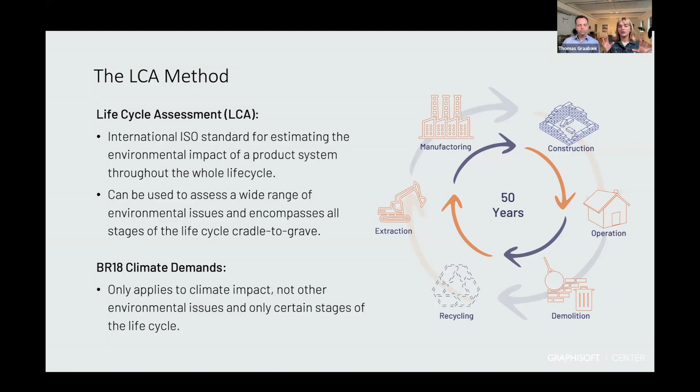But according to the Danish Building Code, we only have to assess CO2 emissions in our LCA, assuming a building lifespan of 50 years. This is the timeline of the Danish Building Code requirements, focusing on buildings built after 2023, when the requirements become applicable.

The LCA only takes into account the global warming potential, essentially the CO2 equivalent emissions from the building. All buildings need an LCA when applying for a building permit, but only buildings above 1,000 square meters need to be under a certain threshold—12 kilograms CO2 equivalents per square meter per year as of right now. This threshold will be revised, and in 2025 it will be extended to include all buildings regardless of size.

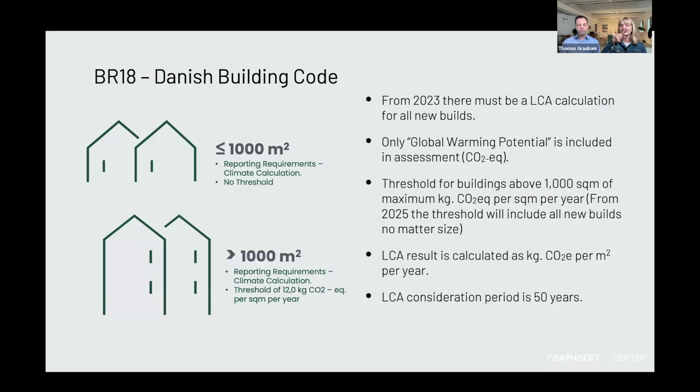Back to what the life cycle takes into account: when making an LCA of a product, the different life cycle stages are divided into modules, labeled with a letter and a number—A1, A2, B4, C3, and so on. These are the modules a building is divided into according to ISO standards.

According to the Danish Building Code, we don't have to take all modules into our LCA calculations—only the ones marked in orange. This is the production stage: extraction of raw materials, transportation of raw materials to the manufacturing site, and conversion of raw materials into products.

During the use stage, we need to include the replacement of building components over time and the energy consumption during the building's use. For end of life, we only account for waste processing and final disposal. We also include Module D, the recycling potential, representing potential future benefits of recycling. This can be hard to assess since recycling technologies and potentials constantly change, but we still have to implement it.

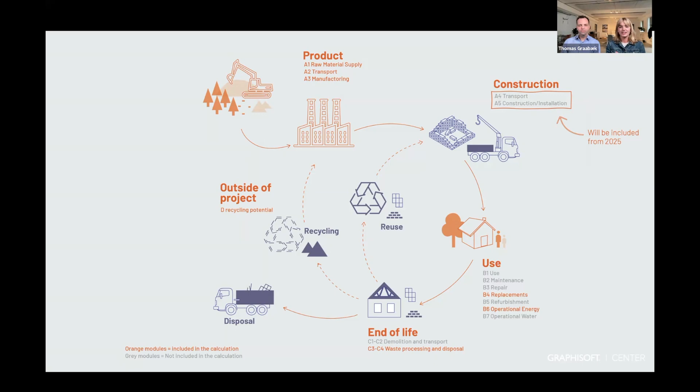I've talked about requirements applicable from 2023, but also mentioned requirements from 2025, because the thresholds and overall LCA requirements are constantly revised. This is the timeline of the initial plan for Danish climate legislation's involvement in the construction industry. The overall goal moving towards 2030 is to reduce total CO2 emissions by 70% compared to 1990, and to reach this goal we progressively lower the emission thresholds for buildings.

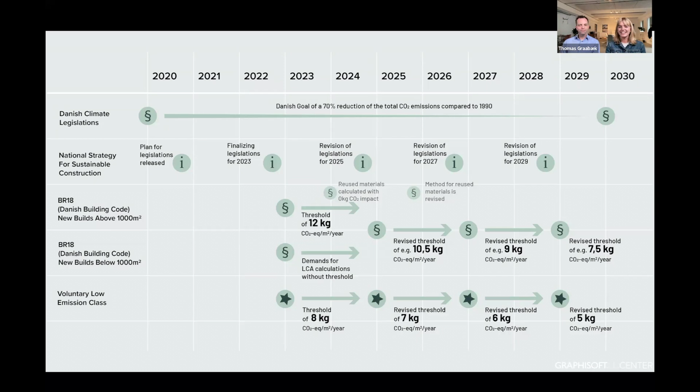As discussed, in 2023 the threshold is 12 kilograms CO2, but only for buildings above 1,000 square meters. The threshold is revised in 2025 to 10.5 and includes all buildings regardless of size. Again in 2027, the threshold is lowered further, and so on.

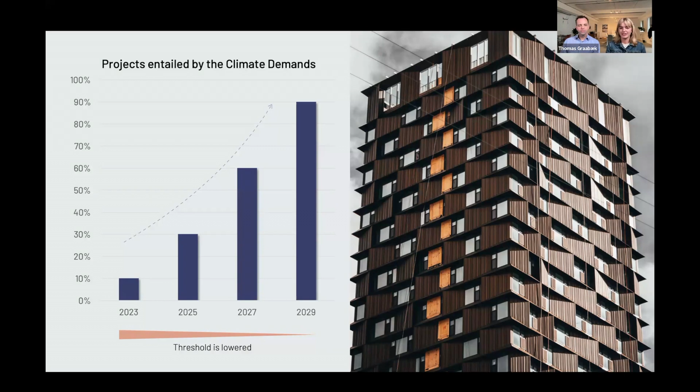Moving towards 2029, as the LCA requirements become more comprehensive, the fraction of building projects affected by these regulations gets bigger—more and more buildings are affected by these demands. In 2023, only 10% of building projects were affected by the requirements, but by 2029 it's assessed that 90% of building projects will be affected. This shows that building projects and professionals need to meet the requirements sooner rather than later.

Especially because the timeline we looked at before was the initial plan, and this is a new plan that's applicable from 2025. With this new plan, the threshold not only applies to all sizes and types of buildings, but we differentiate between the different building types, and each has its own individual threshold.

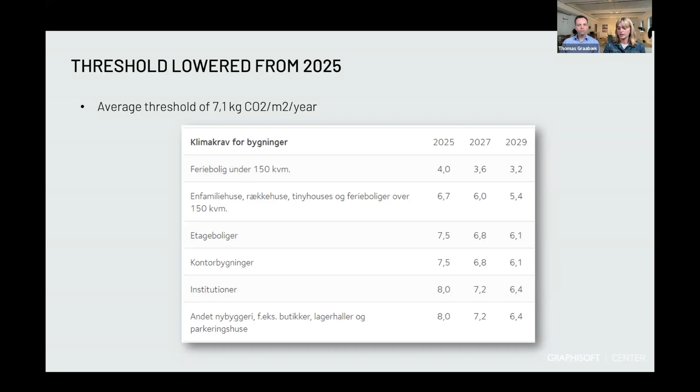This means vacation homes need to stay under a threshold of 4 kilogram CO2 equivalents, and office buildings need to stay under a threshold of 7.5. Overall, these revised thresholds are lower than the initial threshold applicable from 2025. We were supposed to go from 12 today to 10.5, but now we're actually going to an average of 7.1, and for some building typologies, all the way down to 4.

So this is a major change coming in less than a year. Yeah, it is. And it's very exciting to see how the building industry will meet these demands.

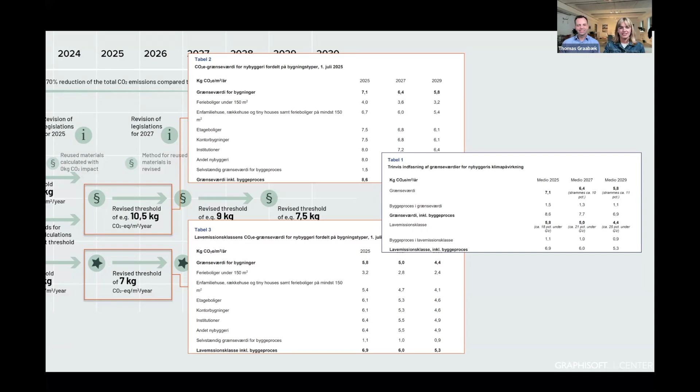As far as we know, it's also in front of all other countries. I don't think there's any country in the world with these strict regulations for all new builds.

In the following, I will take you through the Danish building code specification. But first, I will quickly go through the first revision of the Danish building code involving the LCA requirements.

The key takeaway is that an LCA is mandatory for a building project when applying for a building permit after January 1st, 2023, to document an LCA, and it is the building owner who must document it. But it's not specified which disciplines have to calculate the LCA, nor which tools to use or how to document it. It's just important that the documentation is easily understandable.

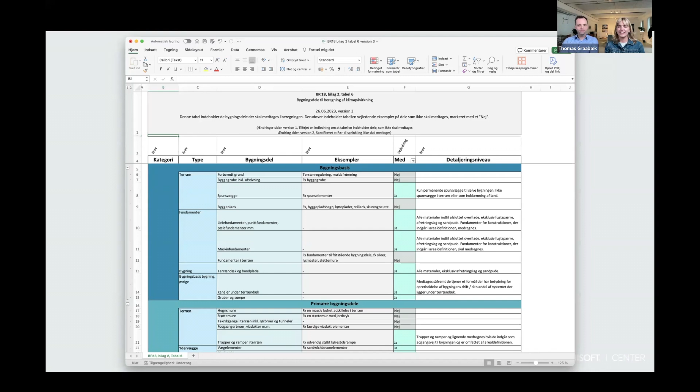The first table provides information on whether a building component or building part should be included in the LCA calculations. For example, stairs are supposed to be included. The last column gives details on when to include them and to what extent—for example, stairs are only required if they are a way of accessing the building, or if they're part of the defined building area.

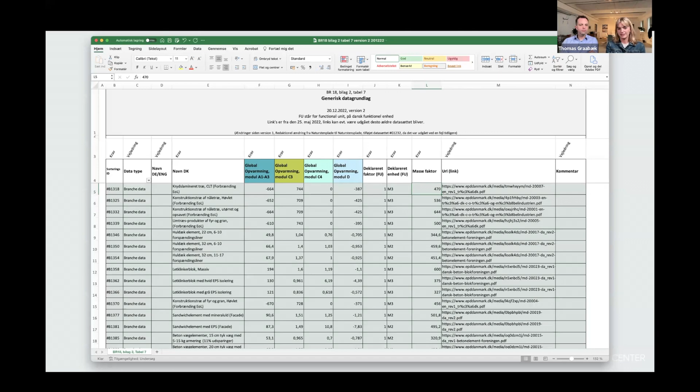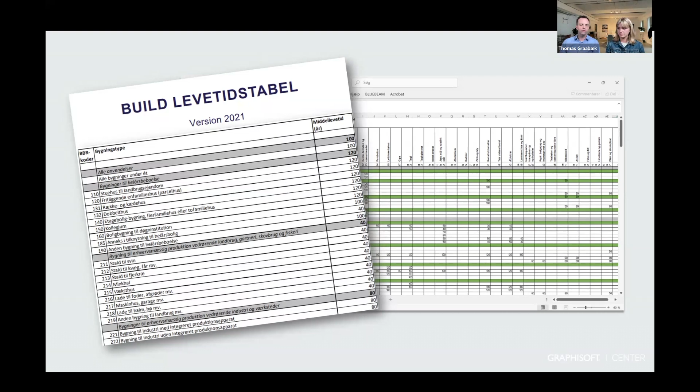So normally when you want to do an LCA calculation, you need to get a lot of information on all the materials, all the products in the building. And that can be super time consuming, and often you run into products or materials that don't have any information available. So to make sure everybody can do an LCA now that it's mandatory, there's a list of generic data you can use, so you don't have to get all these product specific EPDs and values.

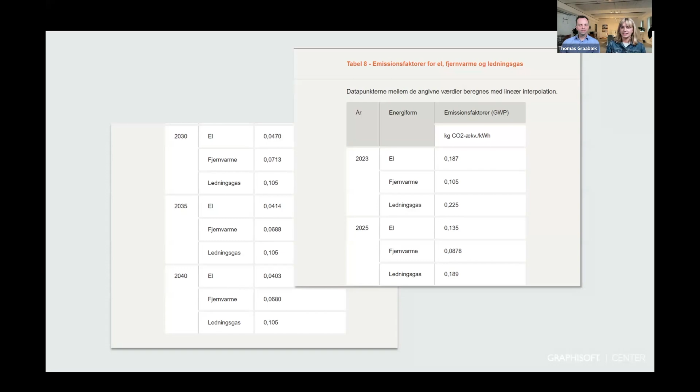So they are especially relevant during the building use when calculating the environmental impact from ventilation and heating and all those things. Yes, and before Thomas takes over, I will go through the latest revision of the building code regarding the LCA requirements, applicable from 2025.

So it's still mandatory to document an LCA when applying for building permit, but now it's after July 1st, 2025. As I mentioned, the thresholds will now include all building types, but will also differentiate, with specific thresholds for different building types. We also need to implement the construction process, modules A4 and A5, as I mentioned.

Lastly, new materials, emission factors, and levels of detail, like the ones we looked at in the tables before, have been added or maybe changed to be more accurate.

Perfect. Thanks, Roberta. We got a couple of questions. First, it's my question. You said when you're applying for the building permit, you get to present this to some authority. What is it, the municipal? Is it something else? Where do you submit that?

You submit it to have the use permit, so it's not the initial permit, but the last use permit. You apply to the municipality, and they look at your LCA calculation, and if they don't believe it, they ask for more documentation until they believe that it's true. And if it seems there's some mistake, and you find out you're actually above 12 kilograms of CO2 per square meter per year, then you're not allowed to use the building.

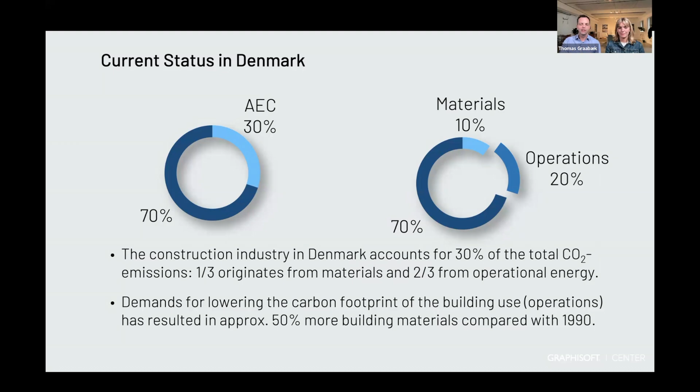And if we compare two kinds of projects, both of them are DGNB certified - that compares to LEED or BREEAM in North America - then 25% on an average concrete apartment project would be the operational energy, and 75% would be the material use.

If you make the same kind of project but with a wooden structure, then 60% would be material CO2 and 40% would be operational energy. So these percentages change when the total size of carbon changes.

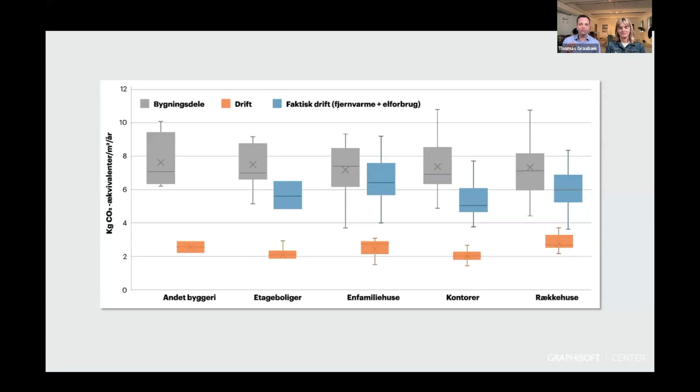And therefore, if you try to calculate the real use, actually 60% of the CO2 is from the energy used, and only 40% is materials.

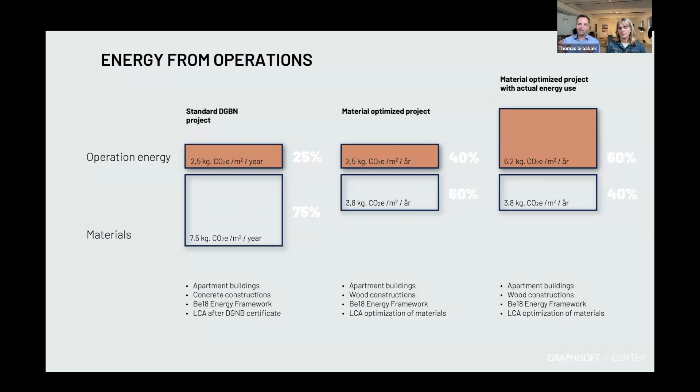My personal point is that we should try much more to balance the view between material use and energy. We cannot just add more insulation and more layers of glass, because we've already reached the maximum capacity of that. Often in Denmark we have 30 centimeters of insulation, and it doesn't help to get 35. So we need to change the design of the building, the size of the windows, the placement of glass, to make this better. And for that, LCA is a perfect method.

Right now there are a lot of different tools, some Danish, some international. The most known is probably One-Click LCA, a web-based product, and it's really good. You can do all kinds of LCAs, also just for greenhouse emissions on buildings. Ours is called Design LCA, and we of course think it's the best one of all.

And then there's LCA Byg, the governmental free LCA calculator, which is more or less a huge spreadsheet where you enter all the quantities, add all the EPD data, and then do the calculation in the end.

So we're going to focus a bit on Design LCA to show you how that works. In Denmark we have a website that shows all the different LCA tools, so people get a chance to compare them, find out which one suits their wallet, their needs, and their expertise. That's really clever given the demands we have in the country.

Our approach, being a BIM provider, is that LCA should be done within BIM. So it's a very strict BIM tool, but it's also a very easy tool. Where some other solutions can do all kinds of LCAs and all kinds of scenarios, ours will just calculate the CO2 from the building you model in BIM. If you don't model it, it's not calculated. So that's kind of an easy way.

The reason we started this project 2.5 years ago was because one of our customers using Archicad was at a training, and they asked: with all this information within BIM, wouldn't it make sense to do LCA calculations directly in BIM? We had no clue this was possible, but then we figured out it's actually not that difficult a task to do inside the BIM application.

Then we worked together with a well-known Danish company called Lendager, an architect office that does very sustainable buildings and focuses a lot on upcycling. We did a few different projects, and this one is a competition project in Germany to test if this works.

What they found out was, if you want to do LCA in a way that's not just documenting something you've already drawn, modeled, and designed at the end of the process, if you want to use it as a design tool, you need to do this in the architect office in the early stages while you test something. You cannot have the engineer working in parallel at that phase, because that would require a lot of calculating by the engineering office, which would be very expensive and time consuming. So the architects need to be able to do this themselves from the early stages.

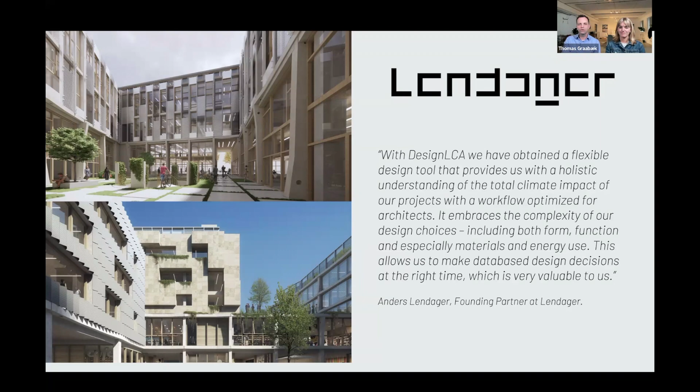With Design LCA, Lendager can now do this themselves, and they say LCA has become a design parameter in their work. So every time they decide something, one of the key parameters is how this performs in terms of carbon footprint. On the technical side, it's just a dashboard: every time you model something, you can see how it affects the CO2 footprint of the building over the first 50 years.

Design LCA is a free plugin, so everybody can download it. It works for Archicad 26 and later. It fulfills the requirements of the Danish building codes, but also the ISO standard of LCA, so it works all over the world.

In Denmark, we deliver it together with a template where we have all the generic data from the Danish building codes, so it's much easier to use in Denmark because we have this data included. In other countries, you need to find EPDs or use an EPD database, and build these different materials yourself, because Danish generic data might not be applicable in other regions of the world.

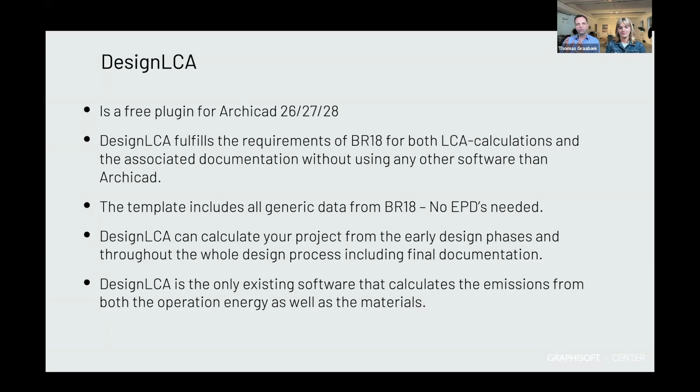But I know some BIM providers are providing a template which has LCA or CO2 data included for Design LCA. Everything is done inside Archicad, and we're the only software for LCA calculations, as far as we know, that can include both CO2 from material use and CO2 from the energy for operations. So that's the special thing about Design LCA.

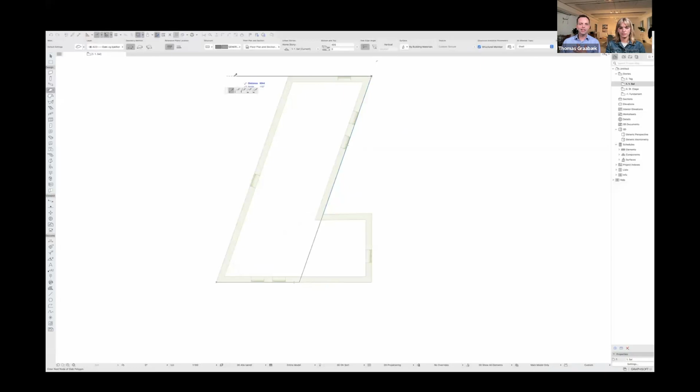So I'm going to show you the first of three videos, a time lapse of the whole workflow using Design LCA. You just open Archicad and start modeling. I'm an architect, so when I start modeling, I have no clue what materials the building will consist of, so it's just gray.

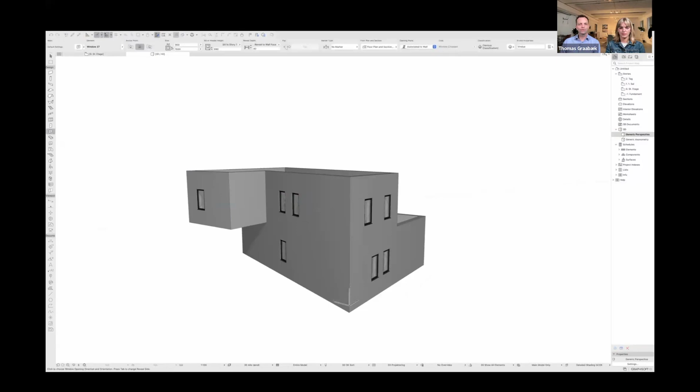At some point I need to add materials, not because I need to know what it's built of, but because I want to do visualizing, so I need some materials on the facades. I think we also need a roof. After the roof, I'll pick all the walls of the project and add a composite, layered material with one click.

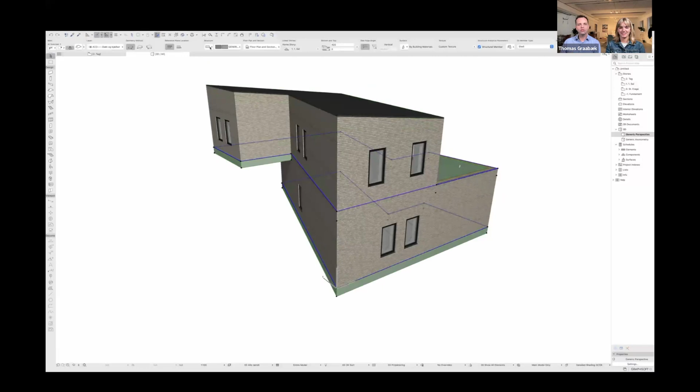So now pick the walls, pick the walls, pick the walls, and change, and pick the slabs and change. You can see the layers on the slabs, but I don't want to show this, so I just model some kind of material around these slabs, and then add foundation. Later on I'm going to change this project to a wooden structure, and the concrete foundation will still be concrete, so this actually has a big impact on the project.

Then I model some kind of gateway to the building, and that's not supposed to be included in my LCA. So the reason I model it now is to show later on that I'm going to exclude it from the LCA calculation.

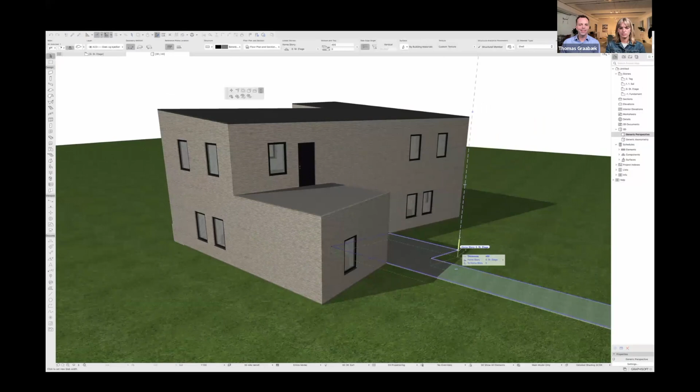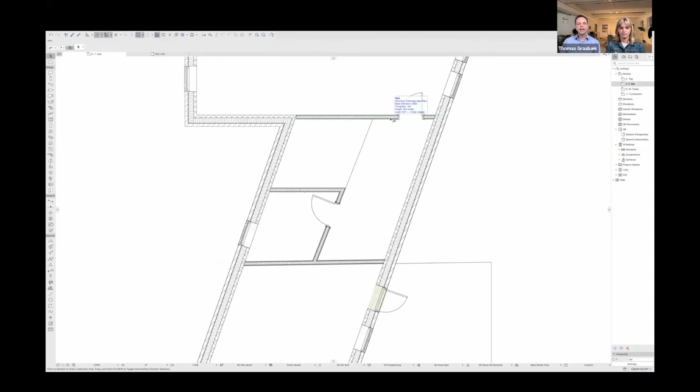Now I think I'm ready to add my rooms to the project, so Archicad understands the outer perimeter of the building and how many square meters it is. I need to have rooms, BIM objects for rooms, inside my building, and therefore I might as well add the internal walls.

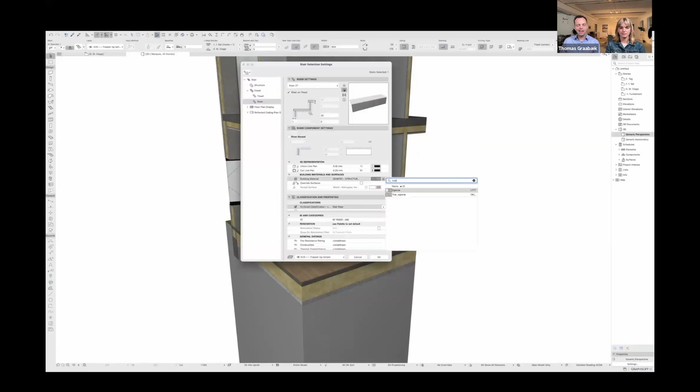When I have a two-story building, it makes sense to add the staircase, as I do here, but more importantly to cut the hole in the slab, because then I don't use too much CO2 on something that's taken away later on. So there's some kind of detail level that is optimal for an LCA calculation, and that's what I'm trying to show with this video, the sweet spot for modeling.

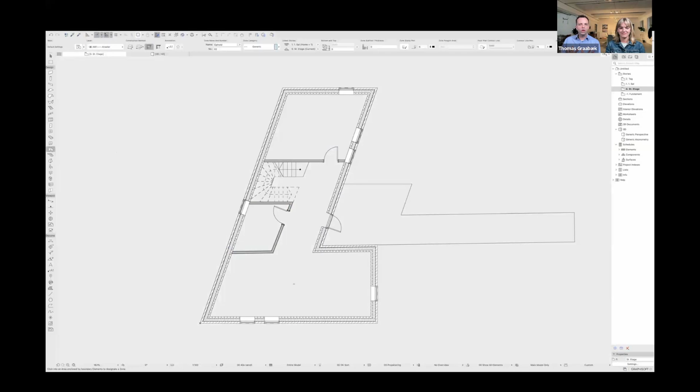I think now I've done the staircase. For the Revit users out there, I know using Revit it will take much longer to do the staircase, but in the end it's more or less the same we do. So now I can just stamp out the rooms in the building, and that's the last part of the modeling.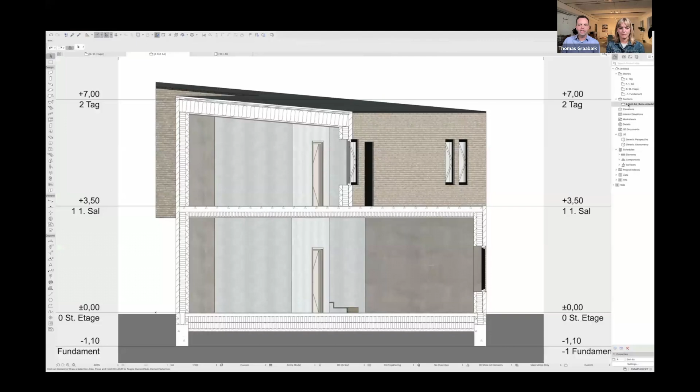It needs to show the perimeter of the building, so I need to cut the rooms with the roof, so it knows where the end of the building is. This is the section that shows the sweet spot of the detail level for a model that's really good for LCA calculation. So that's the end of modeling.

Now let's start calculating. I open up the Design LCA dashboard. I can see the settings here, and then I can see there's 80,000 kilograms of CO2 on this project.

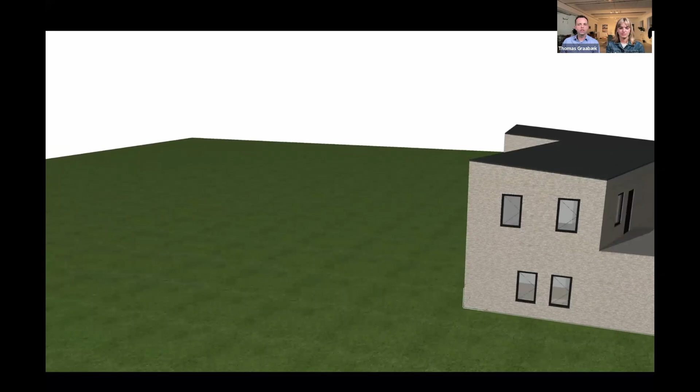I can see the different materials, they have CO2 values, but now I need to do an energy calculation for the operational energy of the building. So I add all my rooms to what is called a thermal block, and I assign different building systems for heating, cooling, and ventilation to this thermal block.

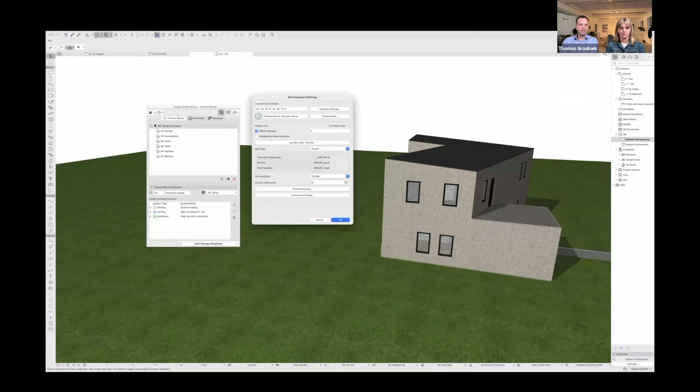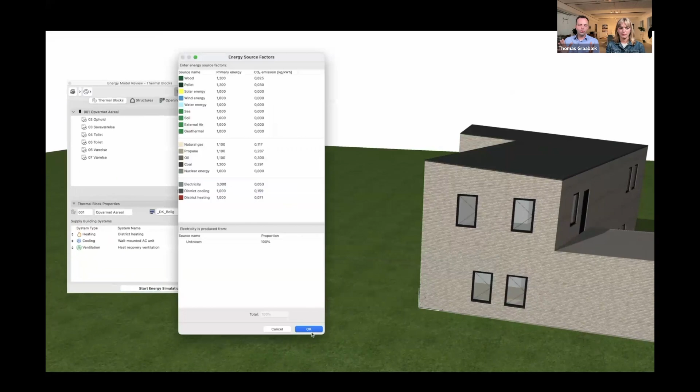And then I say it's apartments, so there's a special use case here. By standard, it's the center of Copenhagen, but I can change that to anywhere in the world, and Archicad will automatically download the weather data for this area. I can adjust the heating systems or building systems, and add solar panels. But if I add solar panels here, I need to know exactly how big they are and which angle they're placed, so I don't want to do that here. I want to do that later on.

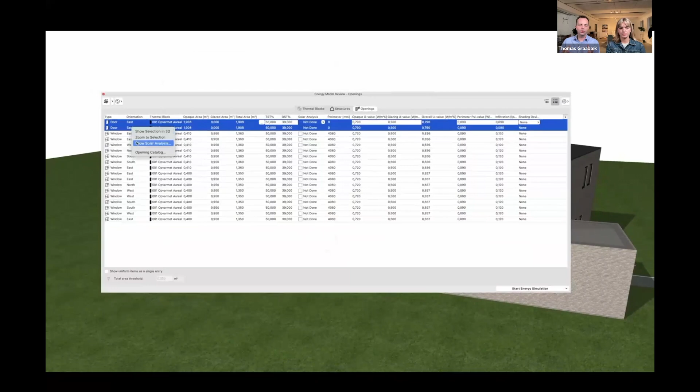Archicad knows all the different building materials, so it will automatically calculate the U values for slabs, walls, and roofs. For doors and windows, I have to help it a little bit by saying the frame of the door and window is wood, how many layers of glass, what door material is used, and then it will calculate the U value. Now I'm ready to do the report of the energy, but I don't need the report.

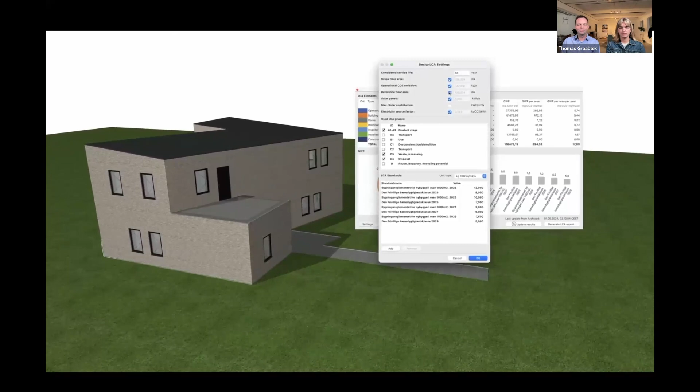I just need to send the result to Design LCA. Right now you can see the blue part of the pie chart is the energy use, the orange is the materials. Now I can change from 17 kilograms of CO2 per square meter to a wooden construction that only has about 15.7. So I have several kilograms per square meter less CO2 by changing from concrete and bricks down to wood.

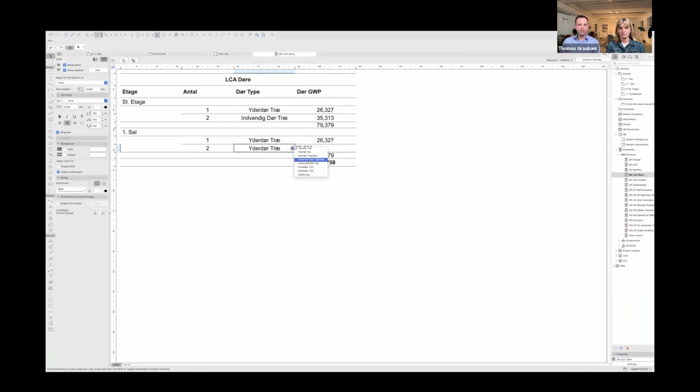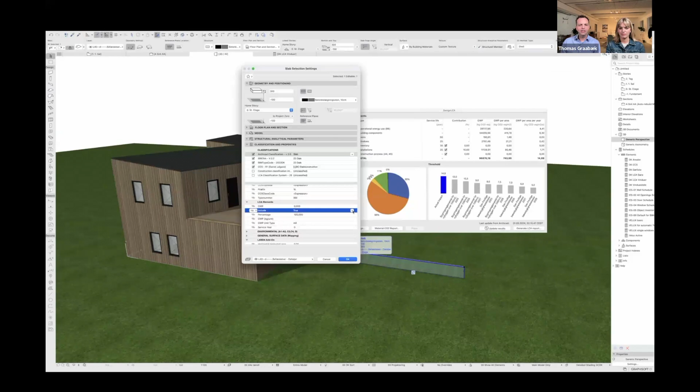Then I can detail the materials for my windows and my doors. So before we were looking at the U values, now we're looking at the material use. By detailing those, the result changes to 14.8, I think. Very small numbers. Let's look at the materials, and I can see there's something in the terrain that shouldn't be included. So I can, on object level, exclude it, and now I can see it's 0.

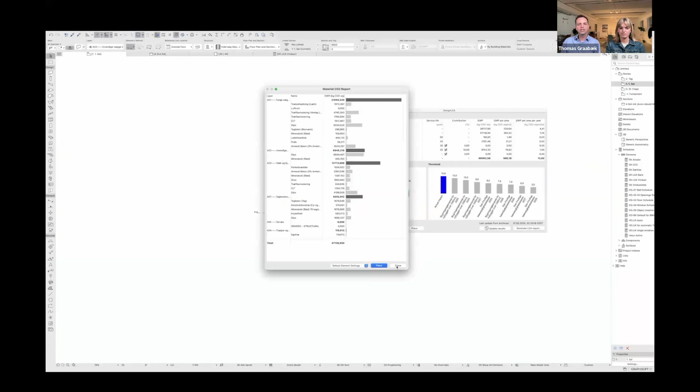So where can I get the biggest benefit? On my outer walls, there's a lot of gypsum with a CO2 footprint, so I just delete one layer of gypsum, and now I'm down to 13.4, I think. Let's look at the inner walls, internal walls, partition walls. They also have gypsum. I cannot just delete that, so I'm changing that to some plywood and some wooden insulation. Now I'm down to 12.4. I'm getting so close to this 12 mark.

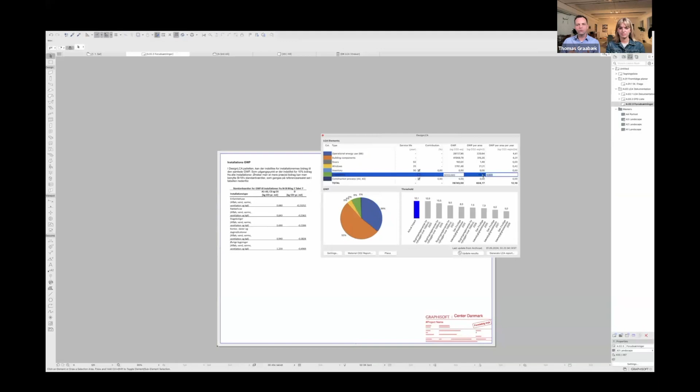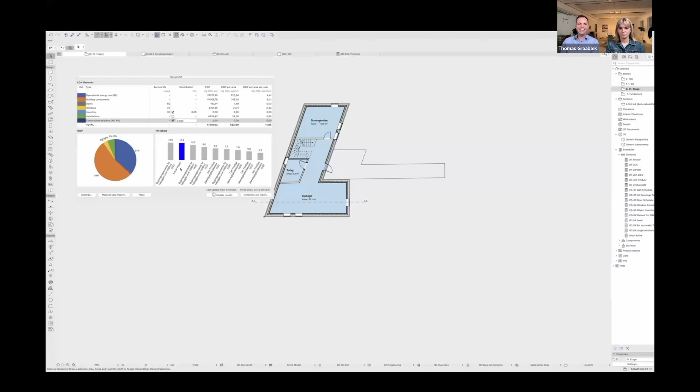In Denmark, we have generic values for the installation material use, so I can just add that as a square meter value. Now I'm down to 11.9, and I reach my goal. I'm less than 12. So I want to prove this by stamping down the LCA calculation on my plan drawing.

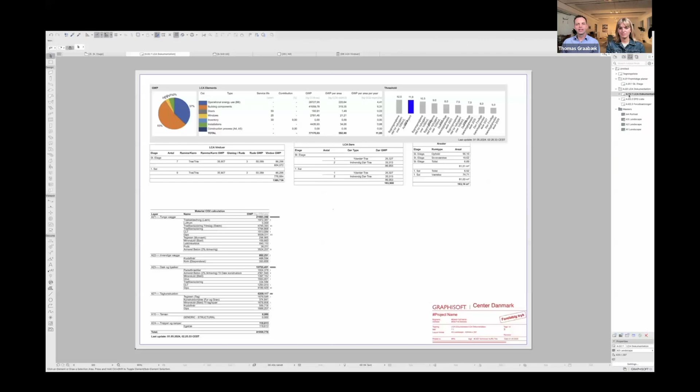But we also did layouts or sheets in the template in Denmark that would do the documentation for the LCA. So that's it. But unfortunately, being an architect, I need to change the project all the time, just because I can.

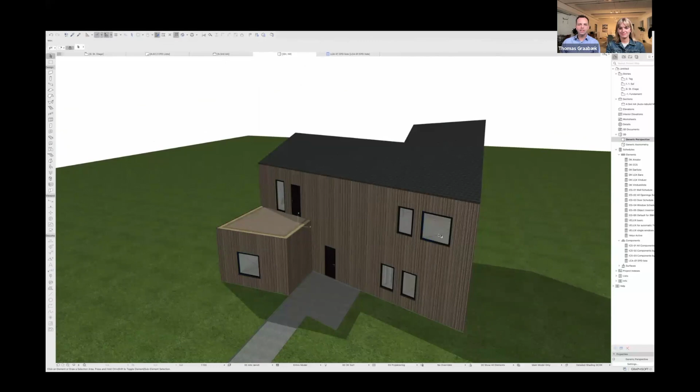So I just changed the pitch of the roof, so I have more roof material, but I also have a lot more wall material. I changed the size of the windows, so they're bigger. And now I changed the whole size of the building, so I have more floor size.

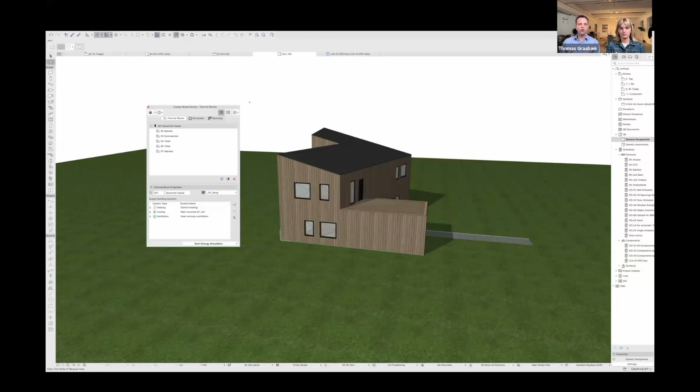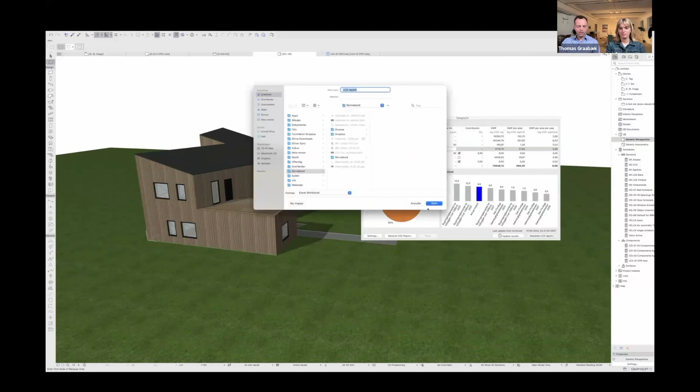To do the calculation now, I have to redo the energy calculation. But I already did all the settings, so I just need to update it and send it to Design LCA. Over here, I just press update, and now I can see I'm on 13.6, I think. So with this new design, I need to do something else to get to a lower LCA calculation. That's more or less the whole process for LCA calculation.

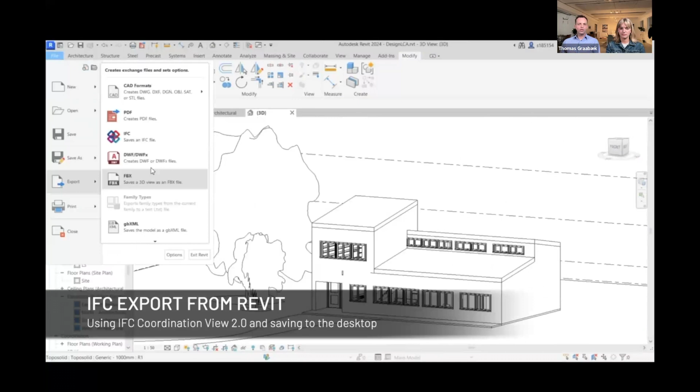If you are a Revit user, then you can still use Design LCA within Archicad by exchanging IFC files. So this is inside Revit, and if you want to do a sketch project, this is a perfect detail level. No information about materials inside Revit, so you just have massive walls with windows, doors, roofs, slabs. You also have room tags inside the building.

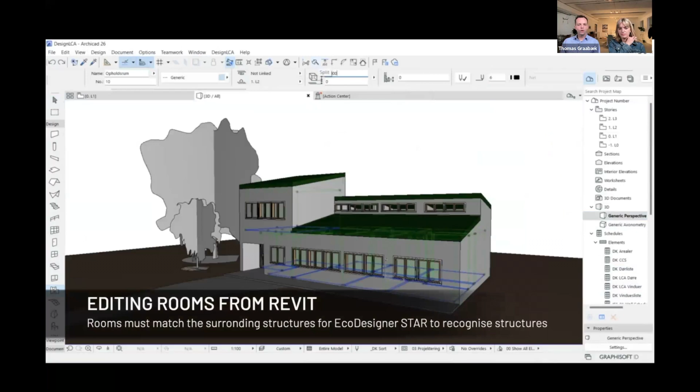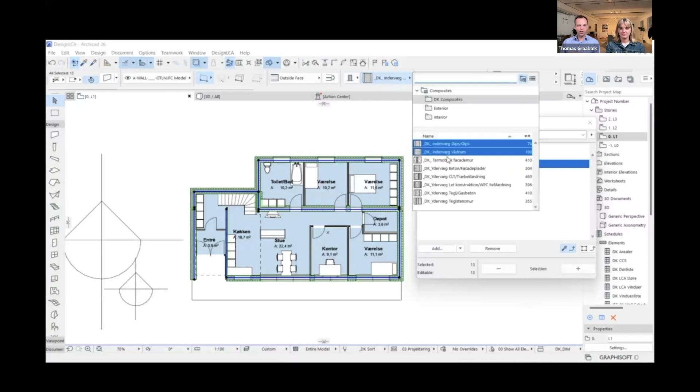You import into Archicad. First, we have to extend the size of the rooms and cut them with the roof, so we have a volume defining the outer perimeter of the building. Then I just change the different element types one by one. Let's do the walls first, change them to a composite in Archicad, this layered structure.

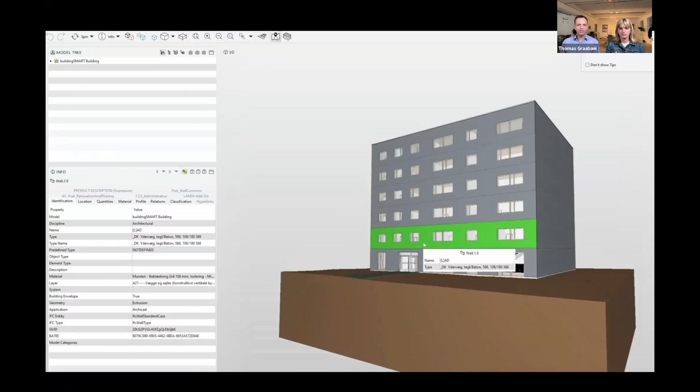Then I change the roof, and then I slowly do all the changes of materials until I'm ready to do the LCA calculation. This is not something that takes up a lot of time inside Archicad if you have the model from Revit. If you're on a later phase in Revit, you do an IFC like this that has all the layered materials already in the model.

This is just an IFC viewer, so I'm just looking at my project. But instead of importing the IFC into Archicad, I just want to do a translator for the import.

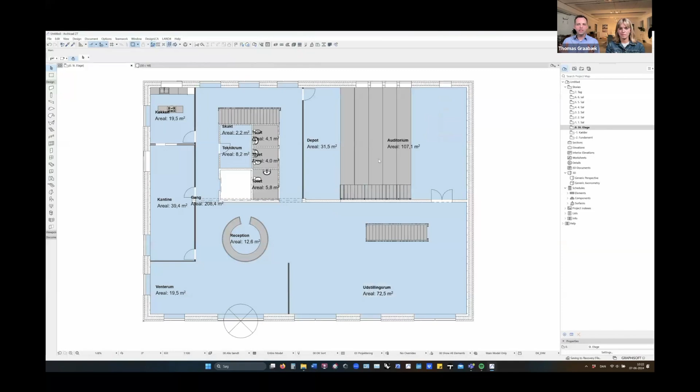Here I point to the IFC file, and I get all the materials in a list, and I can map each material one by one to an Archicad material. So the Revit material gets mapped to an Archicad material. I press save on the translator, and this translator I can use every time I import an IFC with the same materials, and then the materials are automatically translated into Archicad materials.

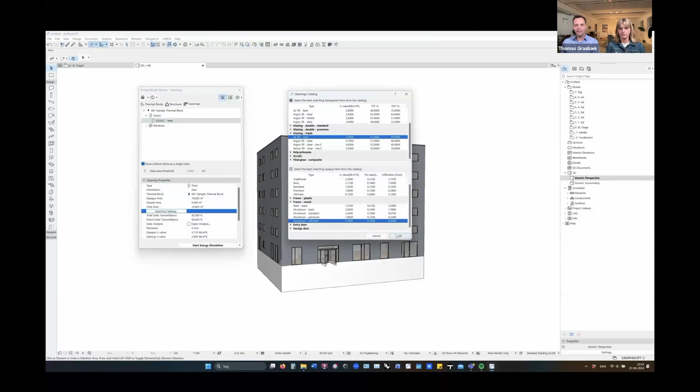So the only thing I need to do now before making the LCA calculation is adjust my doors and windows, do the energy calculation, and I'm done. So the fastest way to do an LCA calculation in Revit is to use Archicad and Design LCA. Of course, there are also many other tools you can use, they're just not as fast.

So this was kind of our pitch about why LCA is a really good way of estimating the environmental footprint of a building. Using Design LCA, it's a free add-on for Archicad. It works in the early phases, it works in the later phases. The more you model, the more detailed your model is, the more detailed the LCA will be.

If you use the Danish template in Denmark, you have all the values from the Danish building codes. But in other countries, you just get the plugin and the calculator, and you have to add the CO2 values to the materials. You can save that as your own template, and then it also works with no extra fees.